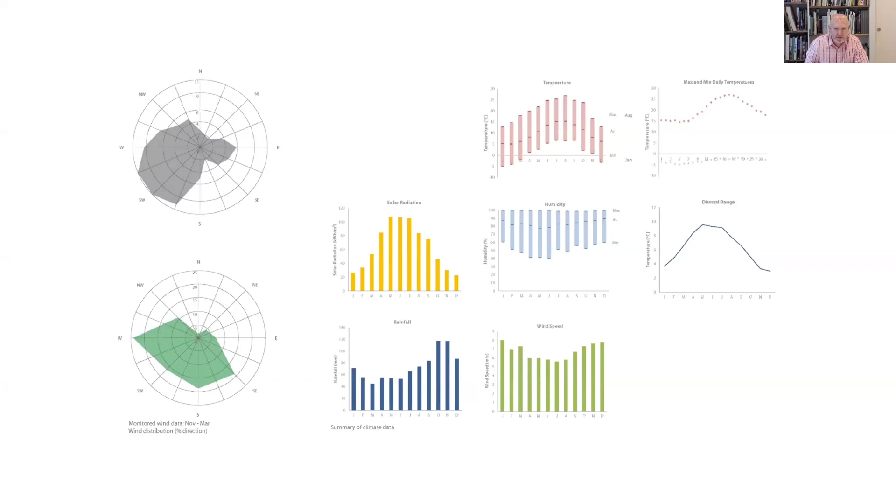The cottage is about 65 square metres, and the extension or new house was 350 square metres. The planners originally wouldn't give us planning permission for a new dwelling on the site, so it had to be an extension, and then once it was built, we applied to turn them into two separate dwellings.

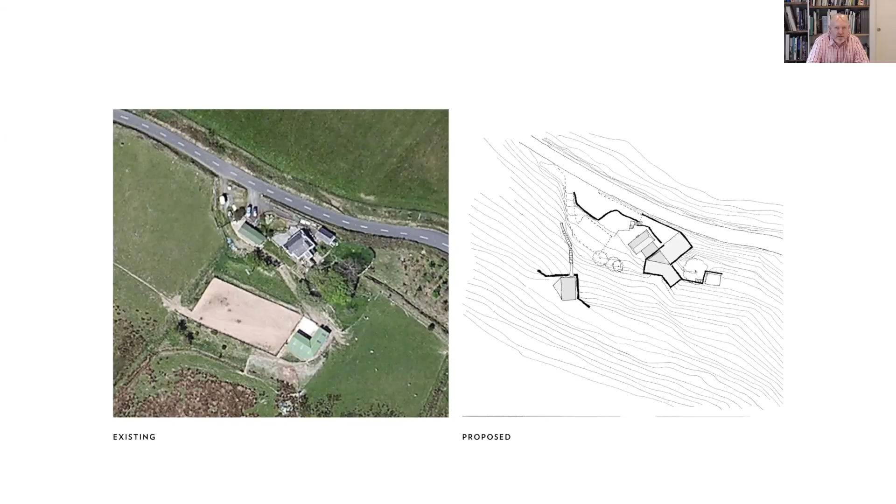On the right-hand plan you can see another building, which is actually a visitor centre just to the southwest of the cottage. This was a prerequisite of planning, really. In order to build the house and create the nature reserve, the clients wanted it to be a public resource, so we committed to building a visitor centre, which I'll show you at the end, to attract tourists and for local schools and other organisations to utilise the site and study the nature reserve.

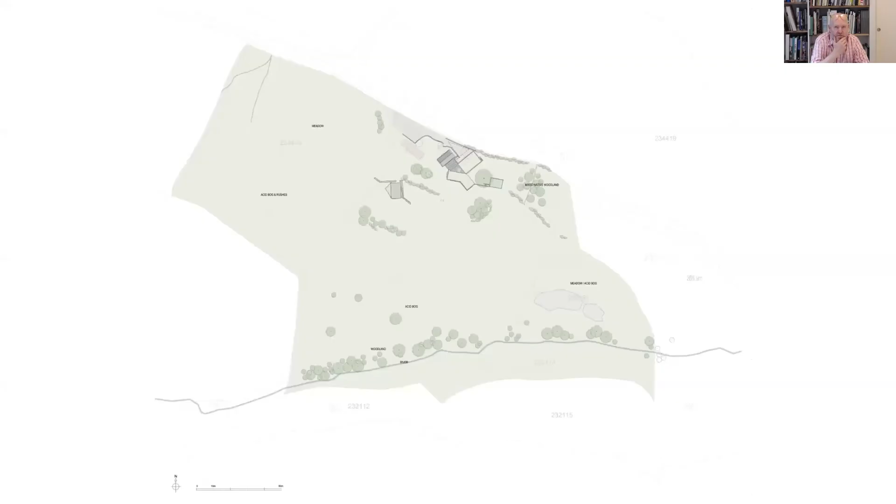This plan shows the house, the visitor centre, and the extent of the nature reserve. We worked with the Manx Wildlife Trust, who did a baseline survey of the site to understand exactly what the flora and fauna were, so we could later monitor the development of the nature reserve and see how well it was doing.

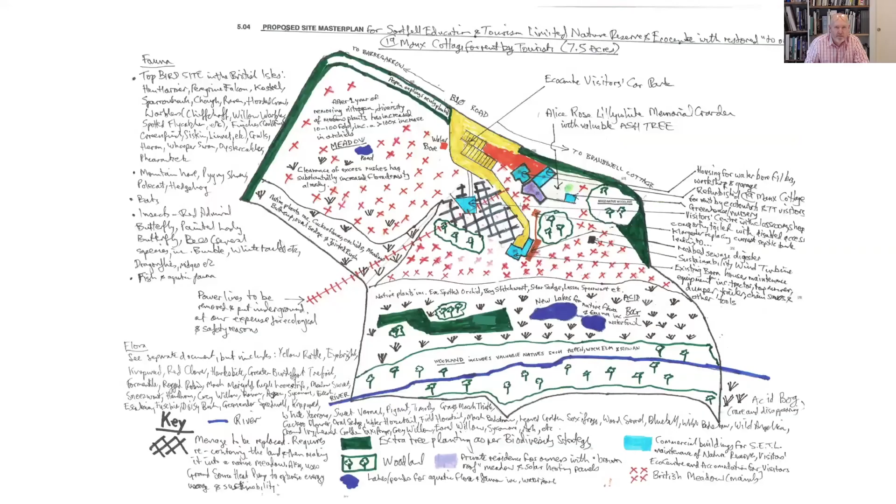This is one of the things we were interested in, in terms of using the stone. Not only are dry stone walls a key feature of the landscape, they also become part of the landscape - they get populated, all the niches and spaces that contain plants and insects, and even birds occasionally.

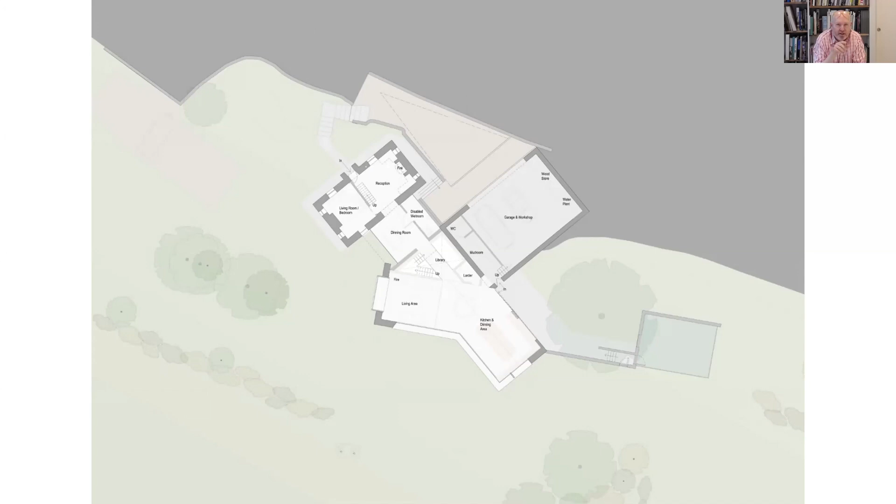This is the cottage and the new house together, and you can see how it blends into the landscape. These were key views for the planners, so we actually did some montages to begin with to illustrate how it would look.

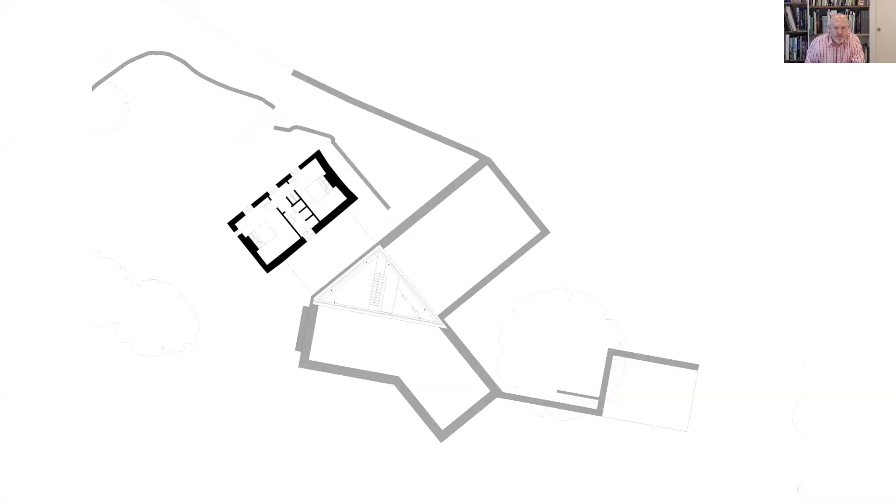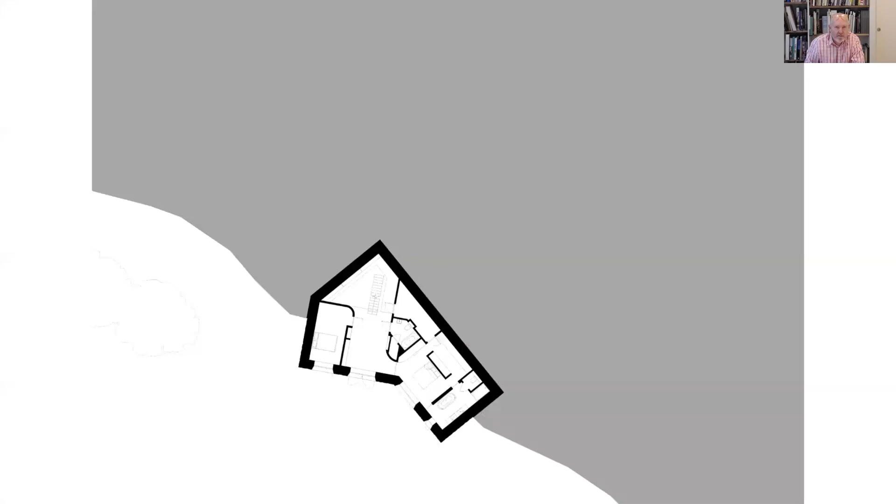And then in the lower level, we've got the bedrooms and bathrooms. And the staircase again comes down, so we get this kind of filtered light coming from above. But because it's dropped into the site, you get daylit windows as well.

One of the important things to note about the building is the stonework. Sort of 80-90% of the stone came from the site. So when we dug the lower level, we excavated and harvested all the stone, and that was then used to create the facade of the building.

then half-bedded stonework. So we created these niches in the stone, in the face of the stone, which could be then populated by plants and insects.

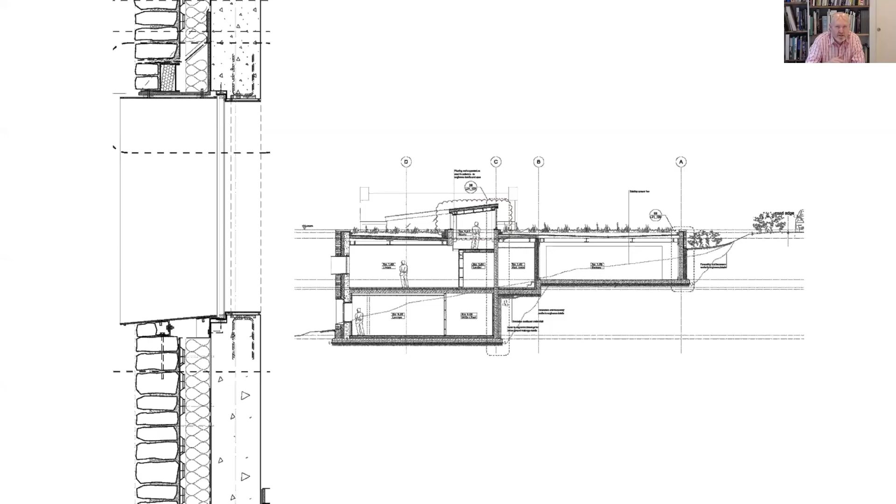And this is our environmental strategy. So we used a lot of different technologies here. We used a combination of things, so solar thermal panels, wind energy, biomass, and also a ground source heat pump.

We created a lake on the site in the nature reserve, which the ground source heat pump was installed into. And then we've got kind of clever things like earth sheltering and wind sheltering in order to kind of improve the performance of the building through design.

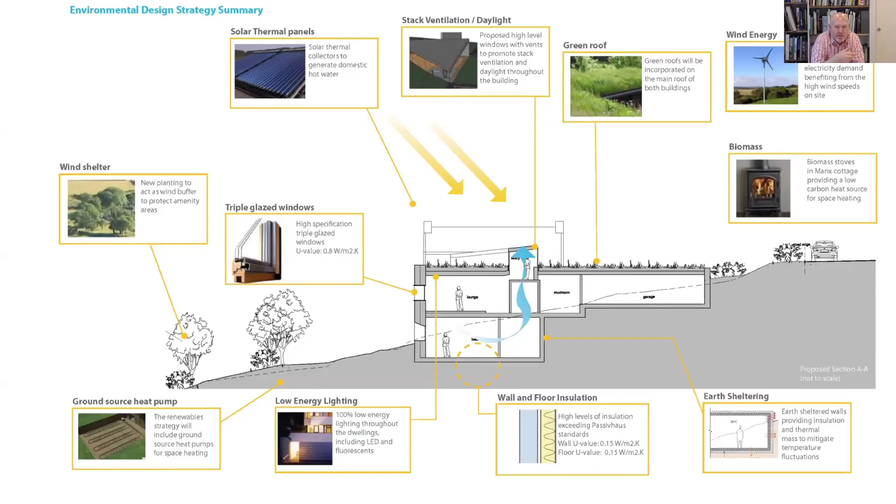This shows the sort of stack ventilation to that knowledge centre or library space.

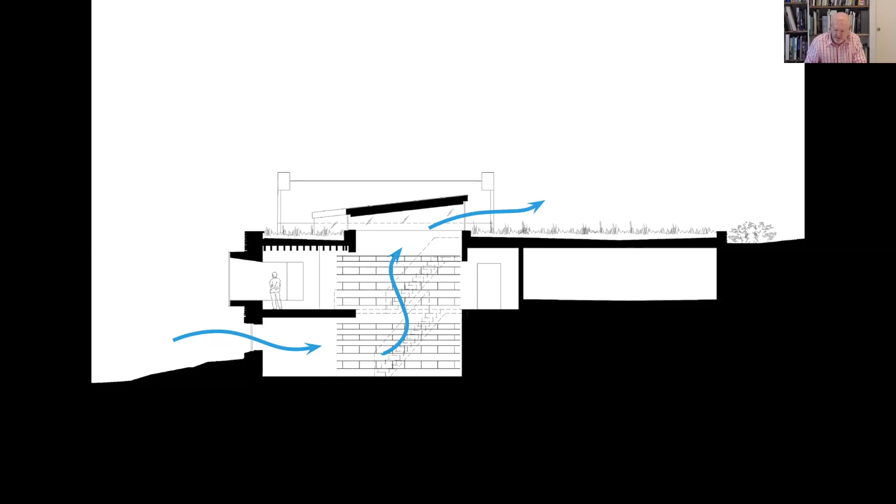So this shows the stack ventilation coming through the office space at the top. And this was a diagram just exploring the solar gain that was going to be coming through the ribbon window and the link building, which links the cottage to the new house.

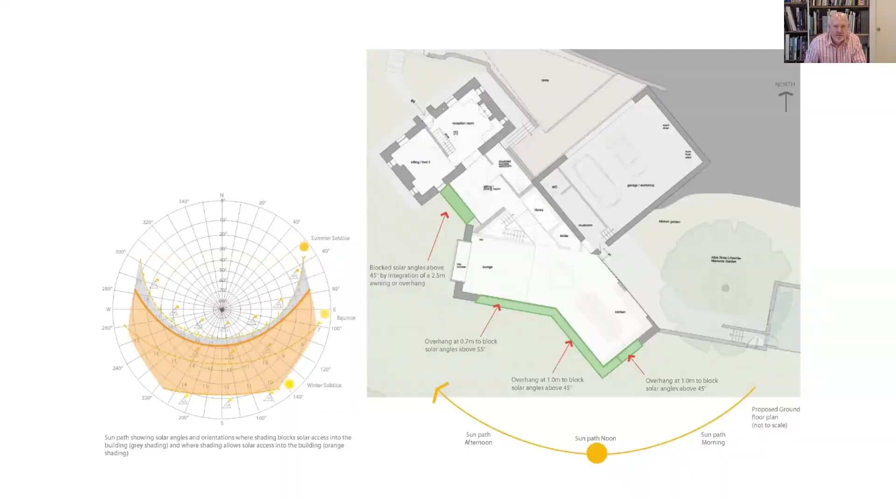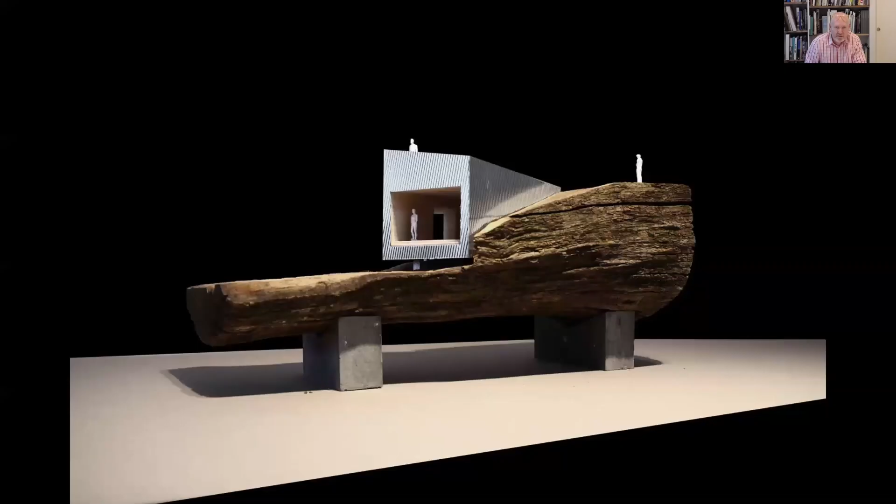And here's a couple of images of the visitor centre. So this is a model that we built of it. So again, it kind of sits into the site. And this is scheduled to be built in the next 12 months.

And that's it from me.

That's brilliant. Thank you very much. I mean, I found that fascinating, and obviously everybody else did as well, because I've had some really interesting questions come in. Okay, one of them is asking how

difficult it is through the planning process to actually design something as an extension and then later get permission to turn it into two separate dwellings. And I don't know whether you just want to make a note while you're talking about that, about whether I've no idea what planning is like on the Isle of Man. Is it separate? Is it a different system, or is it a system that we're all used to?

It's a similar system. I mean, it's a small place, so everybody knows what's going on. And there are other places in the UK that operate in a similar fashion. You know, we've worked in Cornwall.

Right, but it's UK planning law. Yeah, it is. But because you've got quite a tight-knit community, it's very important to kind of engage with people. And I think one of the, you know, that was really, really important because we were architects that weren't from the island. And our clients weren't from the island either. So it was very important to kind of engage with the local community, you know, get to meet the parish councillors, get to meet the local councillors and, you know, politicians and so on. And our clients were very good at doing that and kind of selling the idea of the scheme.

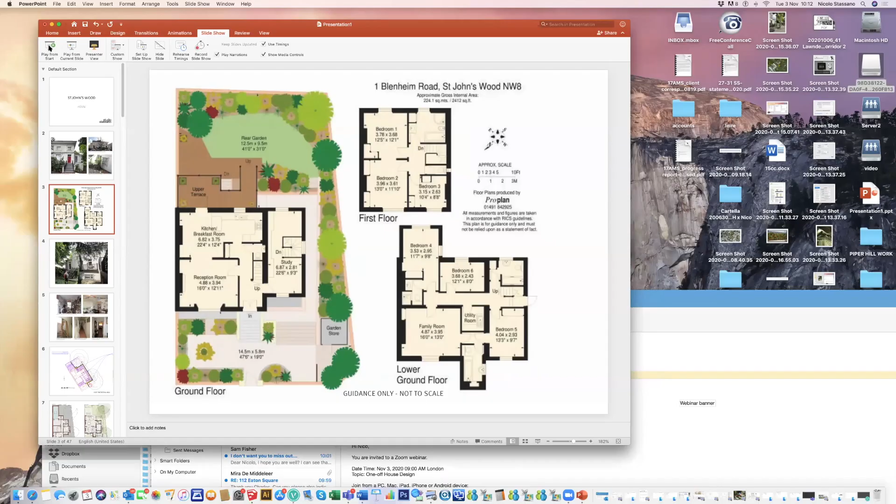Okay, is it visible now? That's perfect. Yeah, if you want to go full screen, we're good to go. So, okay. Here we go.

Okay, so here what I was saying, this is a semi-detached terrace, 1840s, and it's Victorian. It had some alterations in the past, but not significant alterations. So you can see on the right, this is the building. Just to introduce the existing building - what I was saying before, the interesting part is not only how these dwellings have evolved through time, but how they will get changed to accommodate current modern lifestyles.

This property - one of the interesting bits - it had a lower ground, but historically a lower ground mostly would have been back of house spaces. But you can see from this plan, it's completely detached from the external garden, and it accommodated mostly all the rooms. The ground floor is potentially the more family floor, and you can see that in time it had changed to accommodate the kitchens, which usually would have been on the lower ground. Then on the upper levels are more restrained floors, and you could only have a limited number of bedrooms. So in this house, most of the bedrooms were mostly on the lower ground.

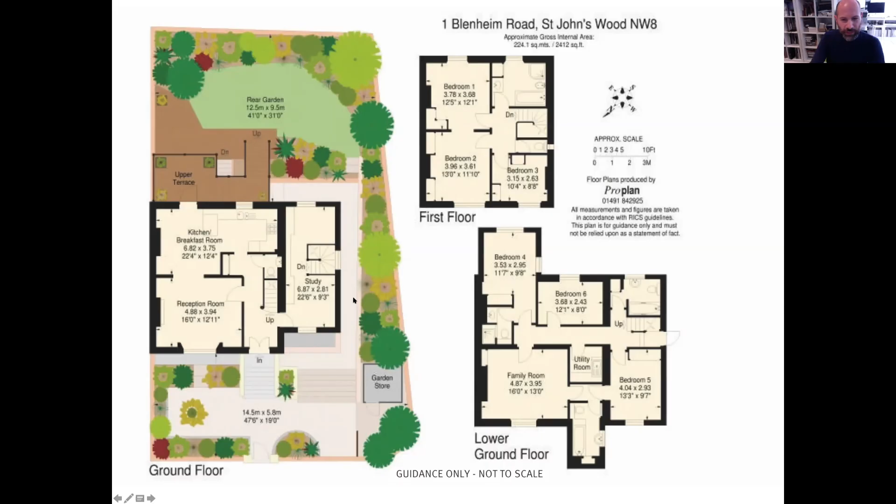So this is the house - you can see the 1940s rear extension, which is quite small, but you can see the relationship with the external ground. It essentially was dug, and it was sunk within the external landscape, so the only connection to the rear was through the rear terrace. To give you a feel of the spaces, this is the side extension where the stair goes down, and then you get a feel about the lower levels - very cellularized, very small spaces, quite dark, with very limited access and views to the exterior.

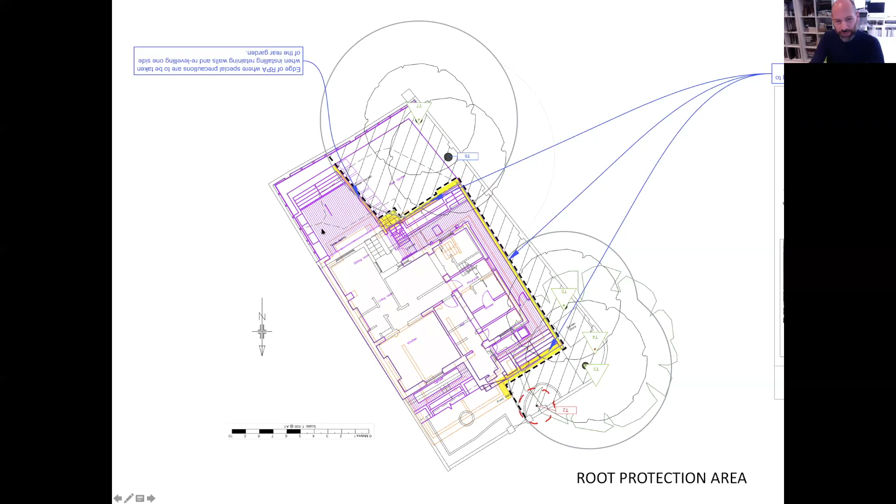I'll take you through what was a process from pre-planning, planning, and the build. What you see here is the pre-planning. The pre-planning always becomes a part of the process where we begin to test the brief, but also test planning law. Like all nice basements, they always start with a swimming pool.

In the beginning, the client, who has a family with young children, the idea was that they were going to move into this property, and they aspired to have a swimming pool, and a large basement which could accommodate a gym, a cinema room, and then some bedrooms.

The lower ground would be the space that would be transformed. The idea is that the kitchen, which was on the ground floor, would be moved onto the lower ground, and the lower ground would then become the heart of this family home. What was primarily important is that the spaces would be opened up.

Not only opened up as larger open plan areas, but opened up so they could also connect to the exterior. So you could see the landscape being carved away, with the limitations of the root protection area. This is why, pretty much, you see the forms that we're having.

The aspiration of a large rear extension that could then be fully opened to the rear. What you'll see later on through the images is the insertion of a new stair, which is much more celebrated than what was there before.

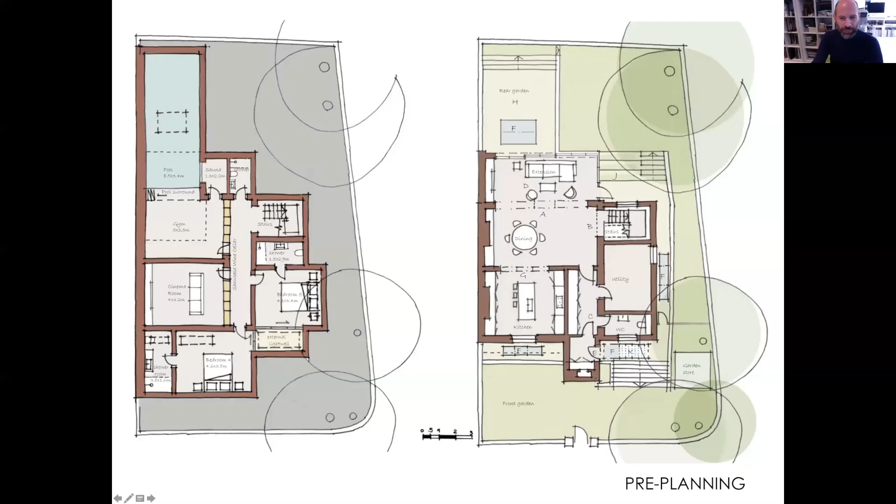Then the kitchen set at the back. So you begin to see the relationship between the root protection area, or the elements of the ground that had to be retained, and elements that could be carved away, and how that began to interface with the aspirations for a large extension.

So this is the ground floor. You can see the rear extension at the back, and then the balcony that's been retained.

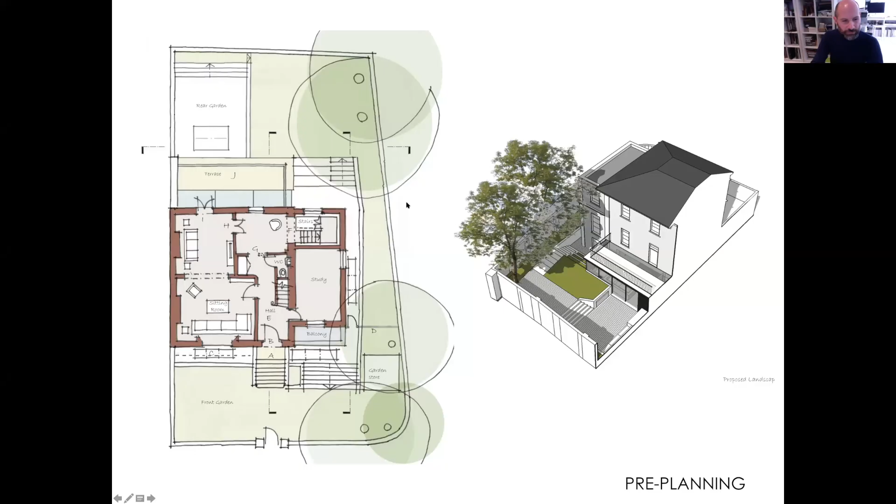So this is the initial visuals, and here you can see potentially a slight conflict, you know, for a client desire to extend out, and a real sort of constraint which had to do with the root protection area.

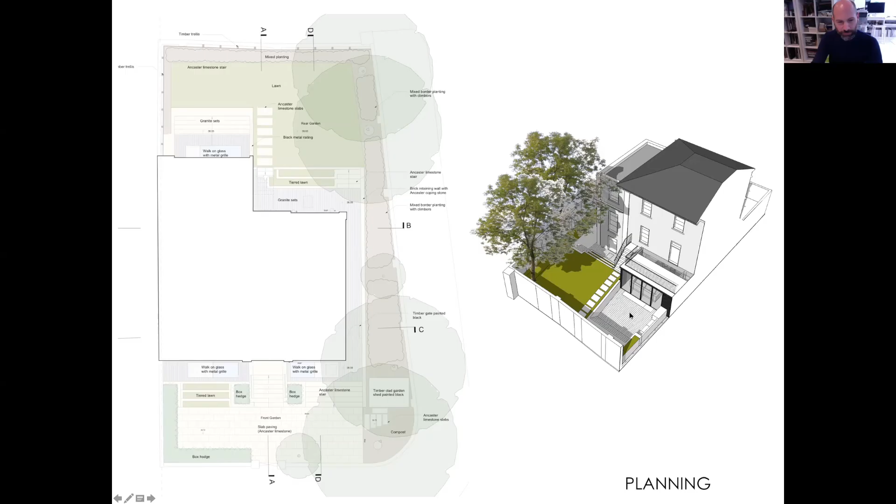So what you begin to see now is a process after pre-planning, where obviously the rear extension was reined back in, and in a way will sit more harmoniously within this landscape. This is the revised visuals.

What I'll go on to now is the house itself. I'll start sharing the plans which got approved and which were built, and I'll start from the basement.

Pretty much what defines the basement is always the footprint of the original house that you underpin. In this case, it's the original house plus the side extension. We had demolished the site—we managed to get permission to demolish the side extension because it was an addition, and rebuild it.

What you then have is areas outside of the footprint, which is always what then gives an opportunity or defines the interior, which is the light wells. So what you begin to carve out or create spaces always defines how you can bring light and ventilation in. We've got at the front the two light wells, which would then be dedicated to two rooms.

One of them would be a gym, and the other one would be a guest bedroom. Towards the rear of the property was a larger space, which became a multifunctional space with a larger light well. This space was meant to be a cinema room, a children's play area, a place they could entertain their guests for parties.

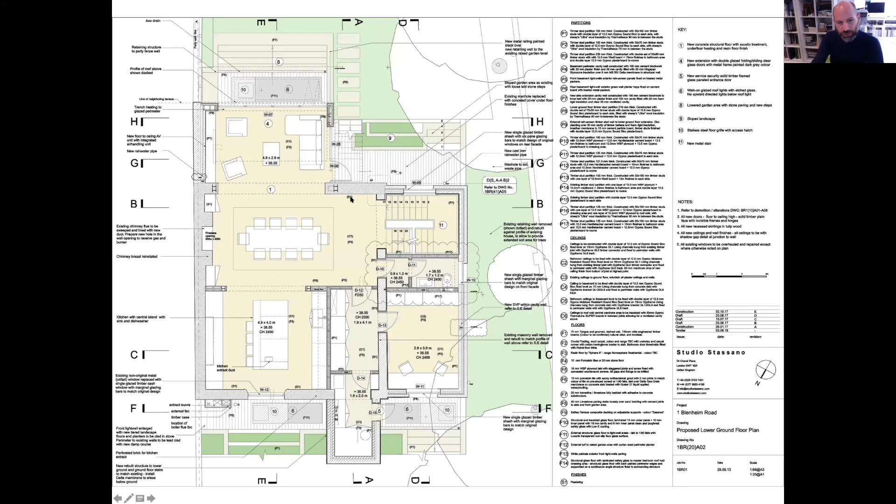This is where all projects start with a very short program but end up running very long. So what typically could have been done in maybe 6 or 7 months went down to 1 year and 6 months just because of the appeal process.

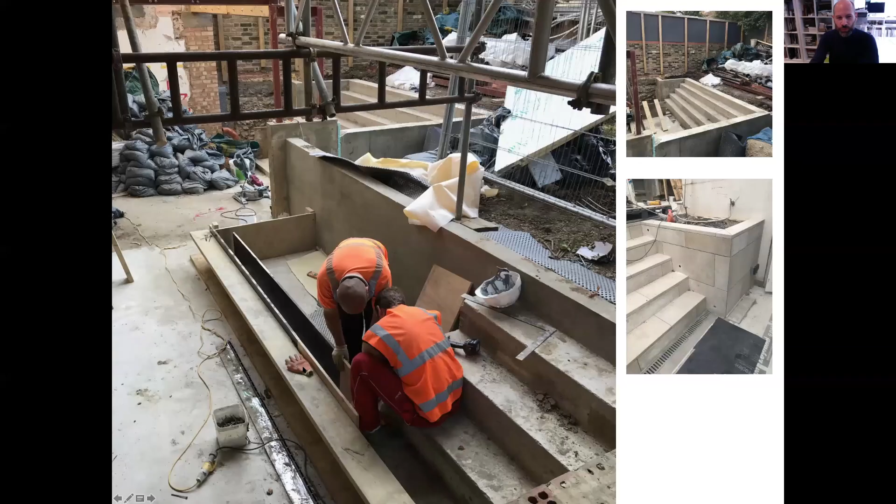And again, this is just to give you a snapshot of what that same site looked like when we were building it. So this is essentially the stairs leading outside the rear extension, and this is the tiered landscape that was being built.

Later on, how that was finished - this was finished in porcelain, 20 mil thick porcelain, and every piece was mostly manufactured off-site to create the right edges, the right edging detail, and it was assembled and installed.

Moving from the inside, and this is in a sense what the property wanted to achieve, obviously within the limitations of the landscape and its levels, but the idea of opening out to the rear garden. So not feeling sunken, but trying to open outside.

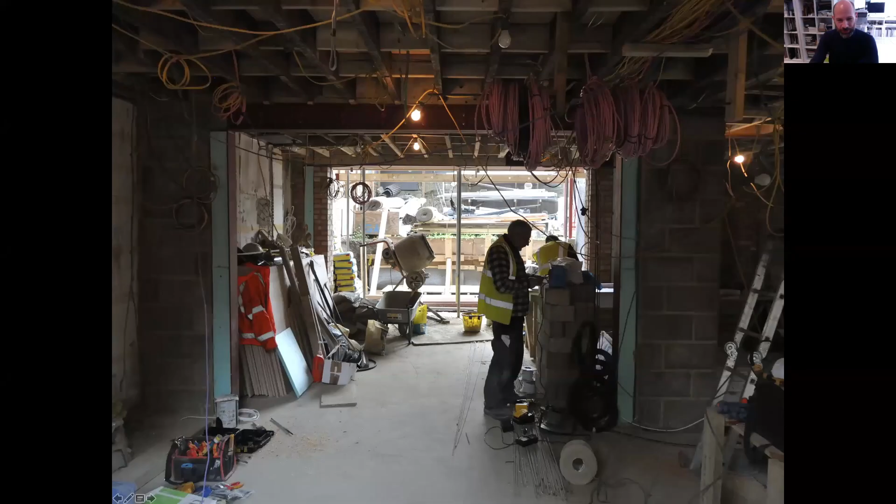And that has been built. So this is, as we built it, we had a new lower ground floor slab. This had underfloor heating. Again, you can see the structural openings from the front room towards the rear, and just the amounts of cabling and services that really have to work their way through these historic interiors.

A view again, from the inside looking out. This is really trying to make as much as possible of pulling away the landscape, so we could allow light and aspect outside.

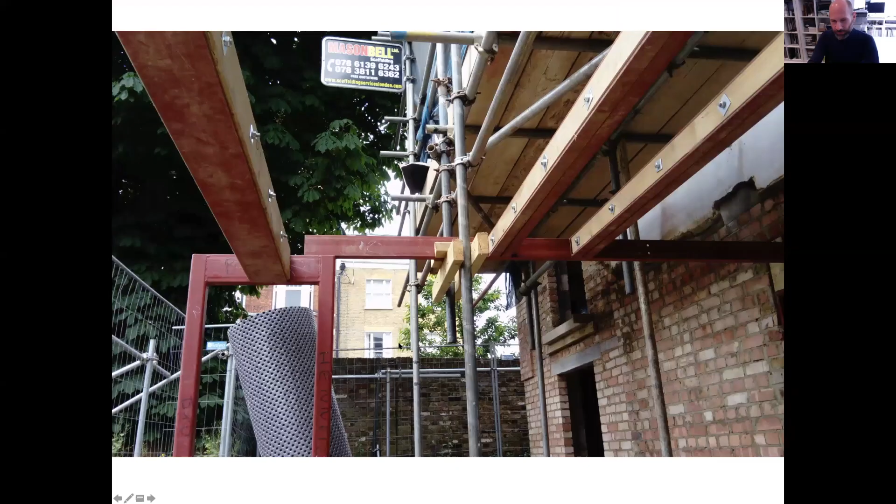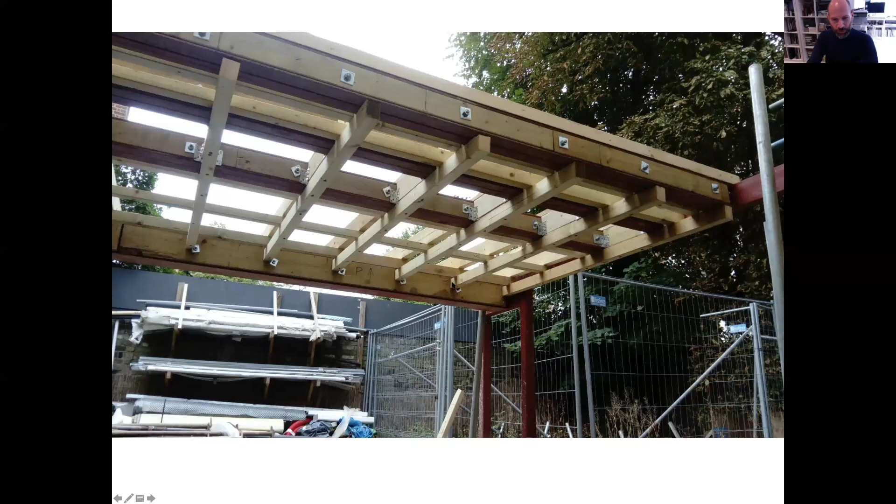This is the construction that shows us the metalwork and the formwork for that roof. I must say, in all rear extensions, the roof is one of the most difficult aspects, because we have limitations in depth and in levels, trying to tie in with the ground floor. The amount of acrobatics that happens at this stage in terms of structure requires quite a lot of time to get right.

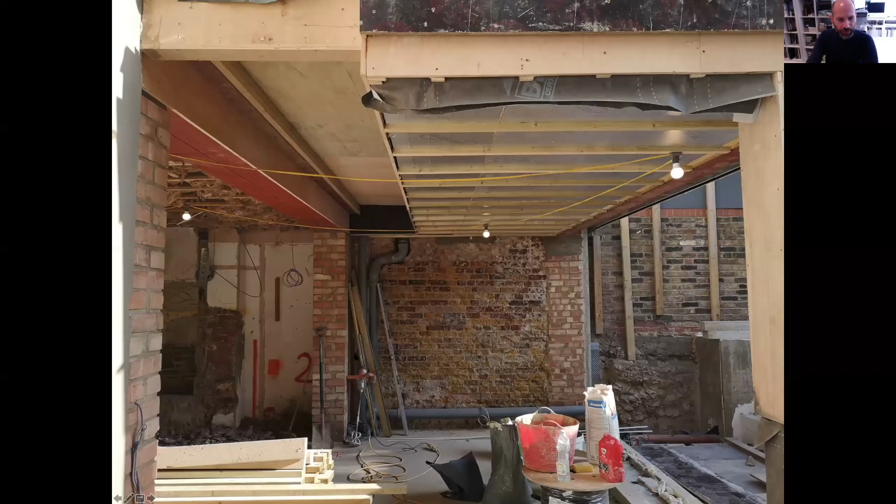This is a view essentially like a long section. You can see the opening created within the principal building, with large steels to hold up the house above, and then the extension being built out.

Another aspect which always becomes quite important is how do you actually drain the principal house. This shows the downpipes, waste pipes, and rainwater pipes tucked away in the corners, some making their way into the basement. But most important is trying to make all the upper levels gravity drain towards the sewers, taking as little as possible down to the basement.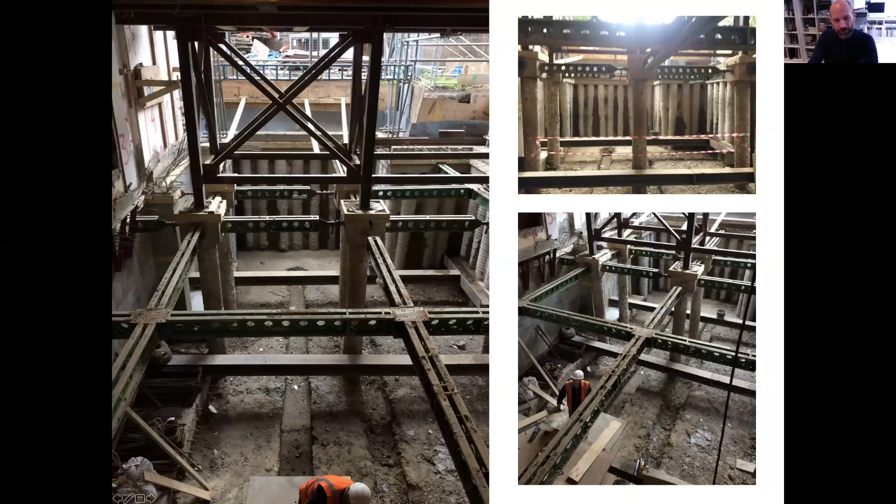But most important, and really an astonishing part of the build, is that these houses, however small they are or however small they feel, building a basement is a large exercise. The amount of steel work and structures required just to hold up these properties is incredible. What you see here is the formwork and sacrificial pins, steel work that is just holding a house hovering above us. And you can see here the basement being built and the whole piles that have been done.

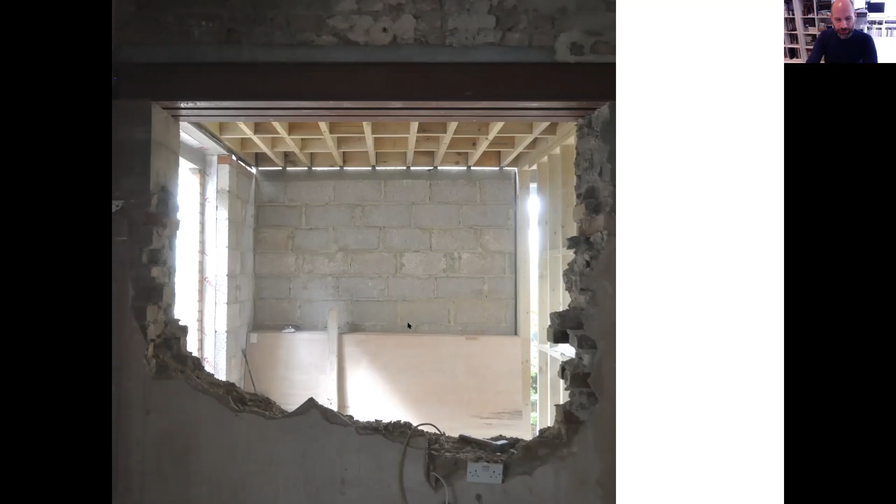Again, snapshots - these are the openings, suddenly opening onto the side extension that was rebuilt, and snapshots of the basement.

It really did feel like a different world, you'd walk down this basement. You're always looking for height, always looking for ceiling height. The finishes aren't here yet, but these were vast, large spaces. What you see here is just before we were going to insert the stair, the space where eventually the stair will come down to.

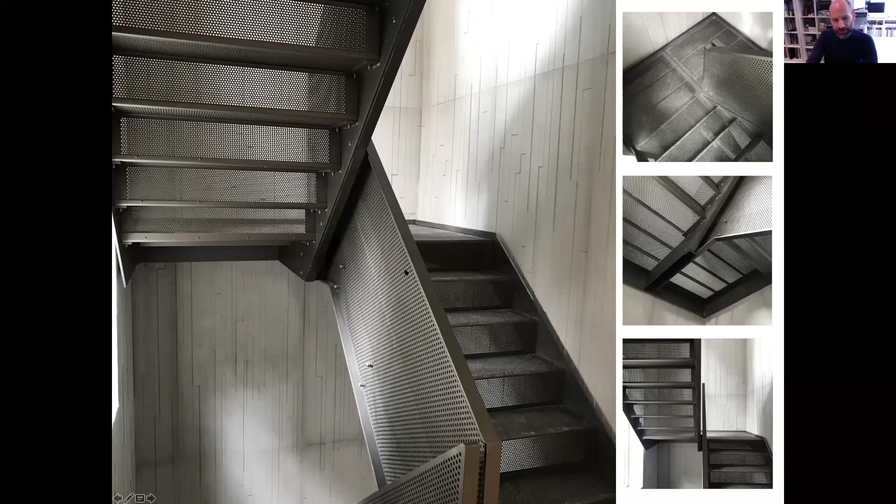The stair that was built was selected with our client, and they felt they wanted something slightly industrial. So we designed a metal stair that was wholly perforated and would float within the void, allowing light to go through the perforations. Even this was quite a challenge. The whole stair was built and fabricated outside in the workshop, but because we were looking for specific seamless details, all of the stair was actually painted on site. It was this electrostatic paint, which was done after it was inserted into the volume.

Now we start to go down to the basement. As you come down the stairs, you've got the Crittall glazed openings that would open up into this multifunctional media room. It was quite effective, as it did allow a sense of openness. This is looking back at the stair now.

And from that media room, the light well - in this case it wasn't a folding sliding door, but just a sliding door, because we wanted to minimize the amount of framing to create more openness. The idea is that these could be opened up, and then essentially bring ventilation and light inside. This is pretty much before that.

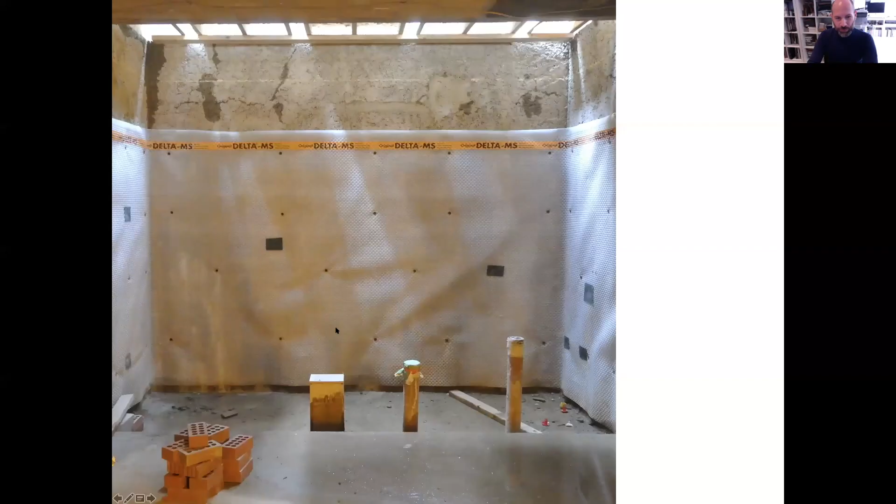All the basement was waterproofed with delta membranes, which went down into modular sumps that would drain the membrane. The whole basement was made of membrane, insulation, and then block work. On top of the block work we'd get quite a rigid finish, so we could then plaster on top of that.

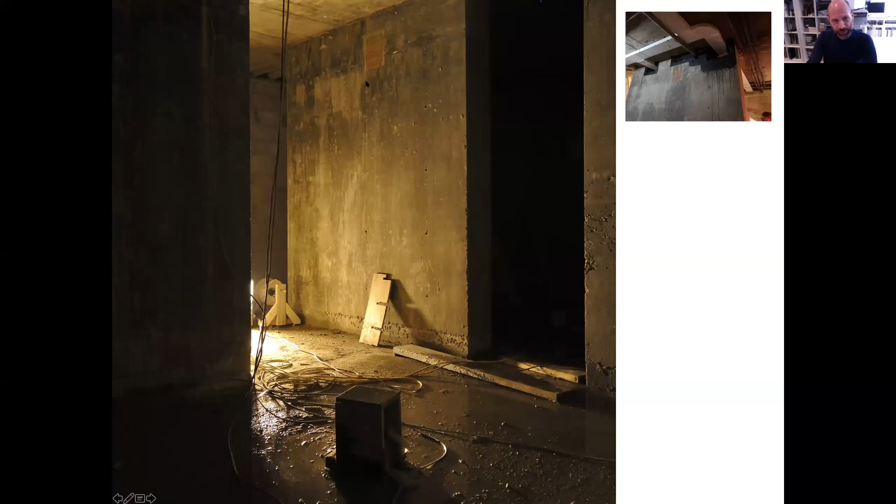Again, snapshots of the basement. An interesting thing is that the basement is always built with concrete, and a usual coordination issue is that the builders never really get the builders work right. So it always happens that once this is all done, holes are chopped up and cut out - and this is where the engineers get all quite worried.

And then back to the inside. This is, again, that central corridor, to which one end there's a guest WC. To the left, as you see here, is that multifunctional room. And facing the other way is the corridor, which then leads onto the two bedrooms.

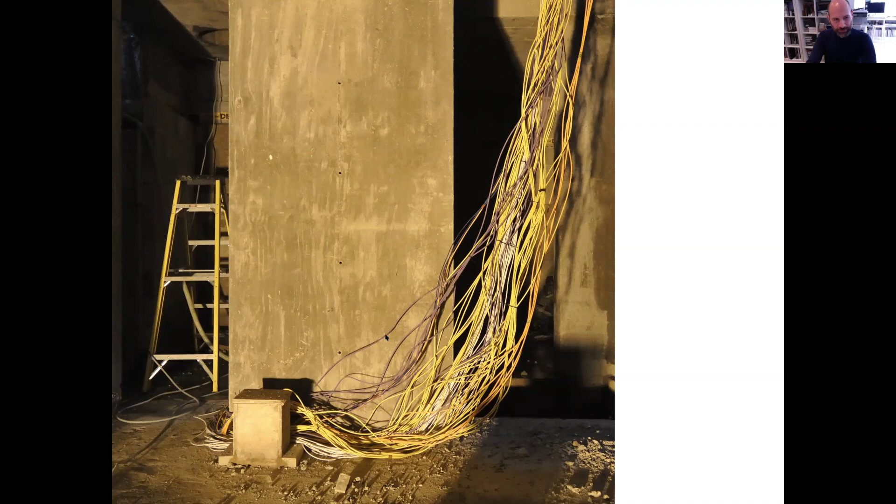At the end of that corridor is essentially an opportunity to bring a little light from those light wells, but it's also the utility room. Again, you can see here work in progress photos. The build process, the amounts of cabling and services that have to be routed through this basement is incredible.

Here, this is the room at the end of that corridor, which was the utility room. And within that utility room, we had the hub. So we had all the lighting, Lutron panels, as well as all the AV racks. And you can see just the amount of cabling that came to this location.

And then tucked away on the side was the plant room. This property was designed to have mechanical ventilation to the lower levels, and then cooling to the basement, lower ground, and master bedroom.

This is, again, one of the light wells, just separating the utility room from the bedrooms. And this is one of the bedrooms.

What always comes as an opportunity in these historic buildings is that the lower ground or basement does not need to be very classical. So there's more opportunity to provide more contemporary design. As you can see in this case, the doors are all full height, we've got seamless finish, recessed skirtings, no cornices.

The light wells, again, views through, and some of the interiors of the bathrooms. That very same space, you can see the slot that goes into one of the bedrooms.

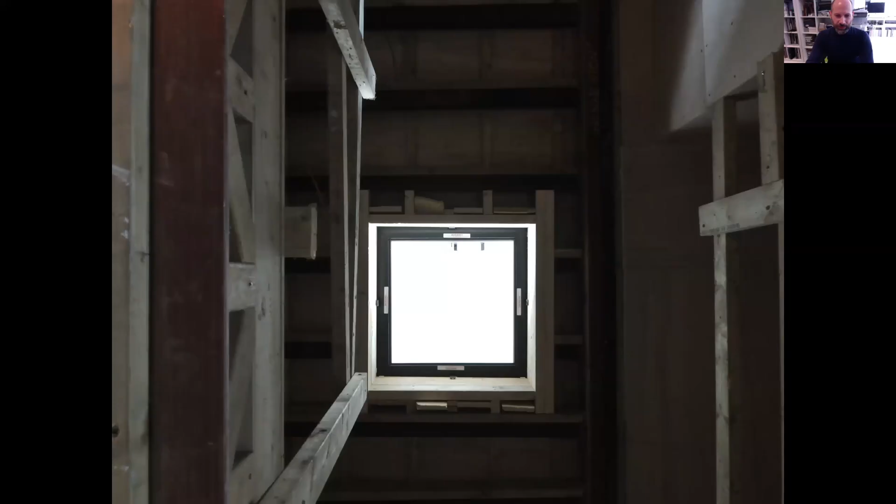And I'm going to finish here. This is the upper level. This is a master bathroom. Again, sensitively trying to keep some of the historic features, and yet insert a modern bathroom within that.

Okay, thank you very much indeed. That was fabulous, and I think it was really lovely to actually go through the process of both design and construction.

There are a lot of questions, and they almost all relate to the basement. I'm going to throw a few things at you. There's quite a few to do with fire. Story height doors, how did you manage fire protection, controlling or sealing? Given your use of sliding doors to the Crittall screen at the basement level, was there a reliance on enhanced fire detection to the habitable rooms at all story levels?

Yes, we did. So to create this sense of openness throughout the house, we had to introduce these doors that you see here, which are the doors to the media room. These are hinged doors, they're metal, but they're fire rated doors, half an hour fire rated doors.

But for the lower ground floor, the whole lower ground floor was open to that staircase, which was then open plan, as you see here. So to achieve that, we had to put domestic sprinklers onto the ground floor.

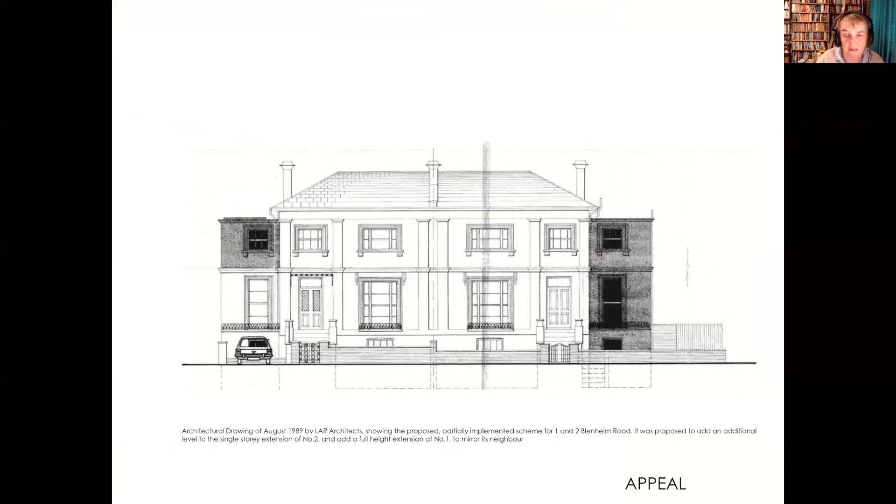I'll take you to the plan. So the ground floor was equipped with sprinklers, each of these rooms had one sprinkler, and that allowed us to create that sense of openness that we achieved.

Right, okay, sorry, there's a bit going on in your background, isn't there? Sorry.

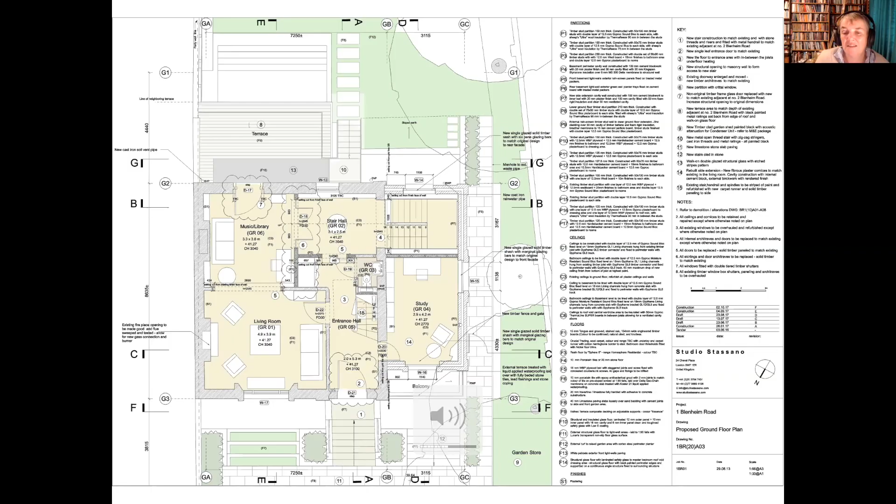I've had a couple of questions around insurance. I'll throw them both at you. The first one: I've recently experienced an issue with building insurance. The property under consideration was underpinned to create a part basement. When it came to renew the building insurance policy, the insurers refused to renew because the property had been underpinned to create the basement. So did you have the same experience? There was also somebody saying they're finding PI much more difficult and expensive this year.

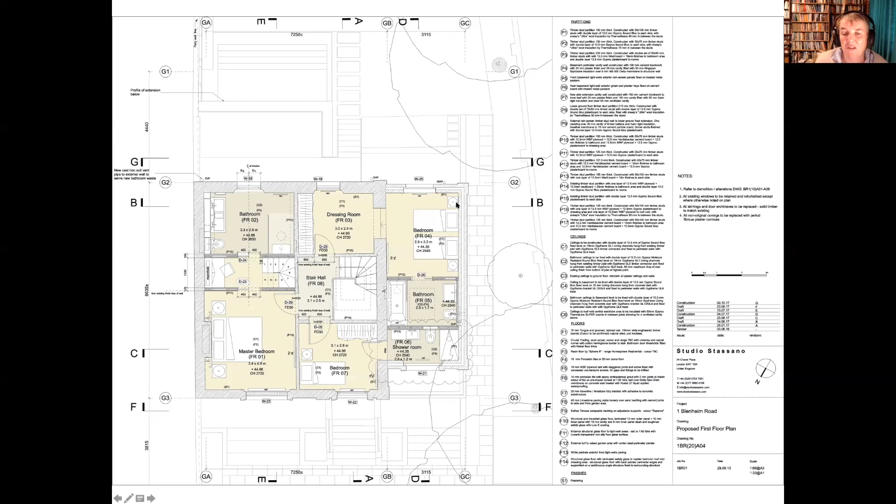Obviously this is a different kind of insurance, partly because of having done basements. Having done a wonderful looking basement project, have you found the same? So there's whether this affects your own PI, because I suppose it's seen as a risky undertaking, and also that feeling of, oh, underpinning, there must be a fundamental problem when actually the property has been underpinned because you're creating a basement. I think it'd be really interesting to hear about both of those.

I think one aspect of insurance falls under the insurance between the owner and the builder. The first question - well, I don't think it's the owner and the builder. I think it's the owner trying to insure their property afterwards and discovering that because it's had underpinning, that's affecting their insurance. So because underpinning is usually a result of subsidence or something, isn't it?

In terms of building the basement, when we build a basement, for instance, this property had subsidence in the past, so it had underpinning. Now, by building a new basement underneath it, this property is more secure from any subsidence. So if anything, it would be more stable. I'm not too sure how that will affect a built basement, but if anything, this building will be more secure and more stable.

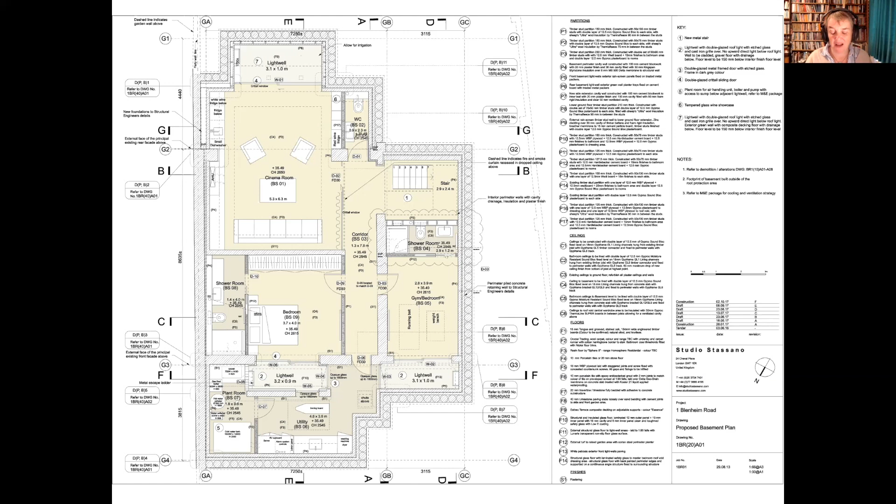That's really useful. I think we could talk about this and a lot more for quite some time, but what we're going to do now is move on to our final speaker. We're moving away from the very elevated area of St John's Wood into suburbia, where an awful lot of us live, and I think maybe quite a few architects wrongly don't really aspire to design there. But we have Percy Weston, co-founder of studio Surman Weston.

He's going to talk about his Ditton Hill house, which he's calling Reconciling Suburbia. I think it is fantastic to see this house, which is both modern and playing on some suburban tropes, but I won't steal your thunder. Percy, over to you. Hello, let me just share my screen.

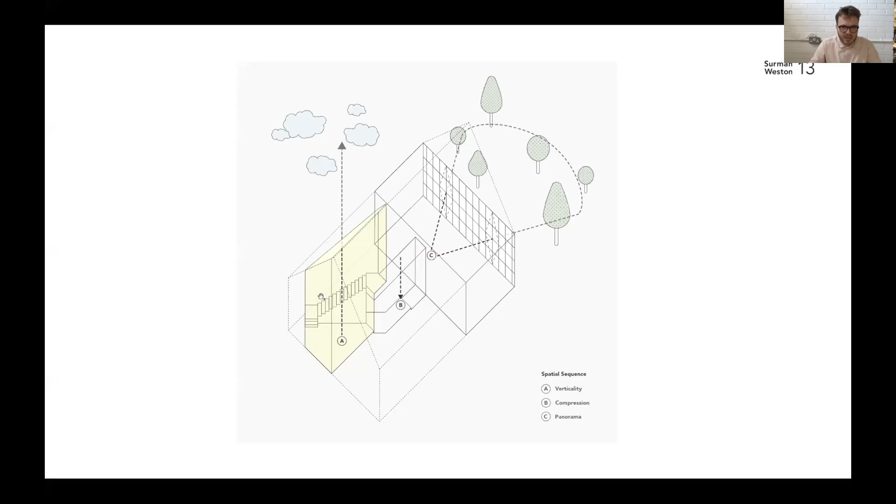This diagram explains a bit about the main tectonics of those spatial experiences. Here is the entrance space that you come into. We really wanted to emphasize verticality here, since the plan is quite tight, and to emphasize the view up to the clouds, basically to the sky. So it's a triple height space when you come into it.

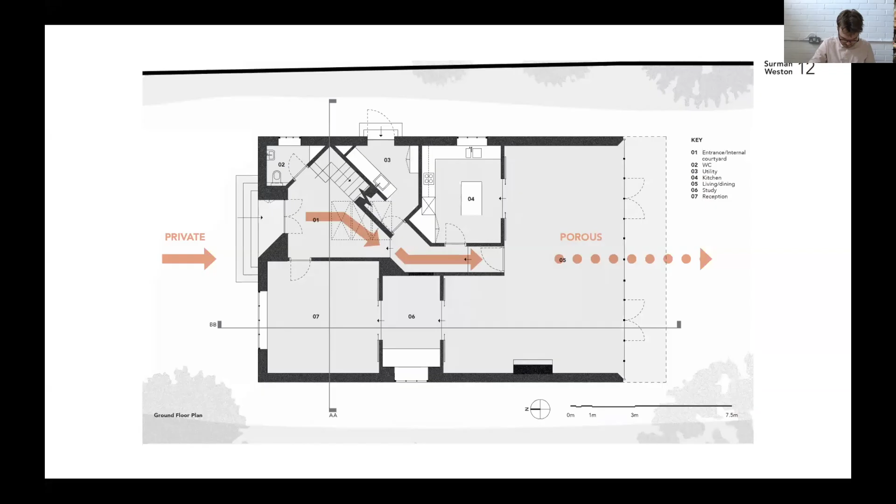After that very vertical entrance space, you pass down a single step under the stairs through into an interior hall space, which was intended to emphasize compression. The ceiling's much lower, it's much darker, so there's a really strong spatial contrast between those two spaces.

And then after that compressive space, you go down another step and walk into the main space at the back, which has a full width panoramic glazing, and the ceiling height goes up and it's much more naturally lit.

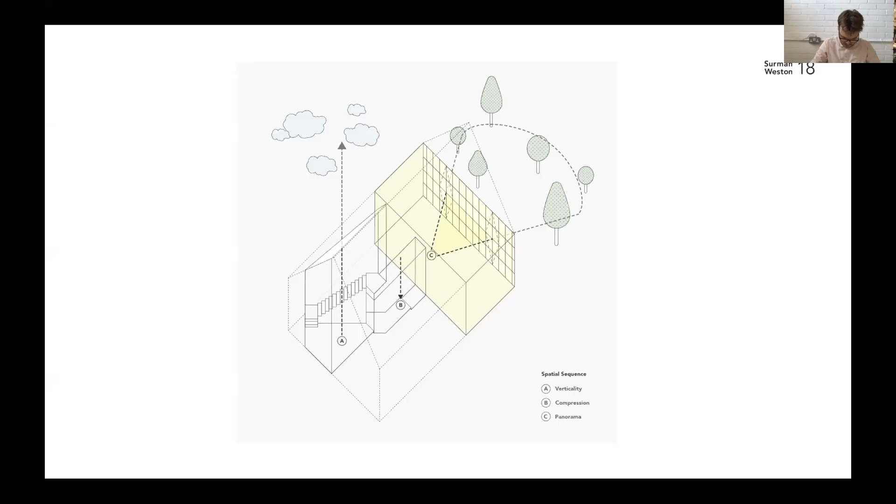So here on the plan, you can see on this side, this is the dining and living space I've been talking about. Because we wanted this space to feel on a totally different scale to the rest of the house, it was important that we could make it spacious and column-free.

One of the advantages of using an industrial technique like steel frame was that we could have this space completely column-free, so nothing interrupted the view. It also meant we could have a large cantilevered balcony.

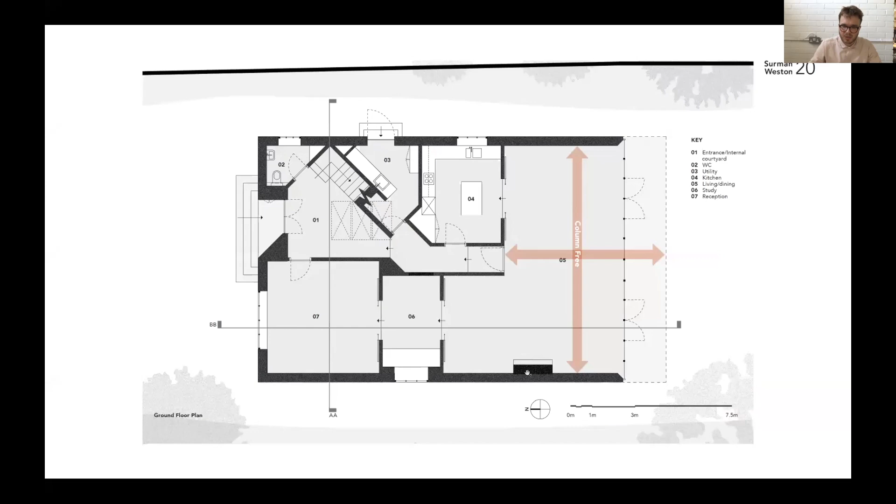We built this chimney using precast concrete lintels that you can buy at any local builder, and then combined that with slurried block work, so it's block work painted with a mortar slurry and then painted again.

It's a good point to talk about there being two main palettes within the house. We wanted the circulation spaces and the habitable spaces to feel quite different, again to emphasize the spatial contrast and difference in feeling between these two types of space.

Within the circulation spaces, the materials are much more industrial and rougher. Going back to some of these photos, you have the hand-troweled concrete floors and the slurry-textured block work on the walls. But within the habitable spaces, we have oak floors and plaster walls, and it feels a lot warmer.

So the fireplace, as the heart of the house, I suppose, is the only place where these two material palettes are combined. You have the timber floors and the plaster, but then you also have the block work and the concrete.

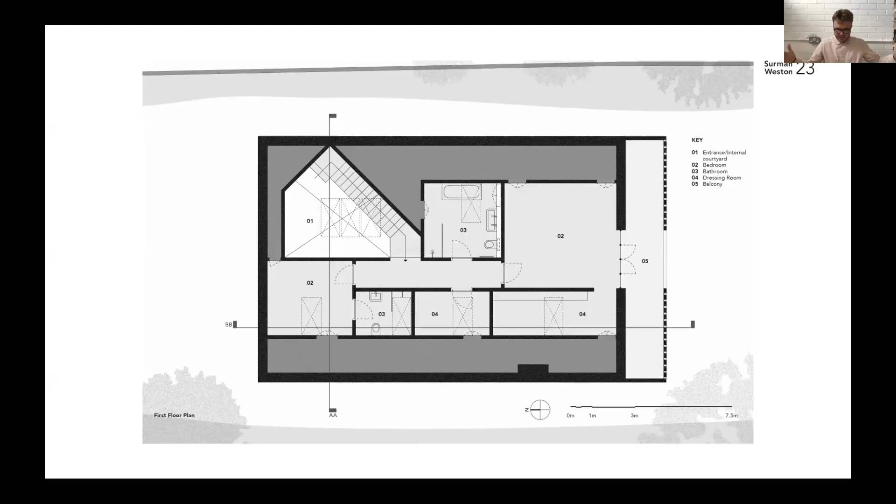The rooms at this level all have quite a dramatic geometry because of their location in the roof void. The eaves come down to about 1.5 meters, and then right at the apex you get 5 meters floor to ceiling.

Due to planning restrictions, we weren't allowed to put windows on the side elevations that could overlook on this level. That meant most of the other rooms, basically every room apart from the master bedroom, is top lit, which combined with the verticality of these spaces gives that floor a real calmness and more privacy, almost a church-like quality, which we felt was more appropriate for bedrooms and places of sleep and ablutions.

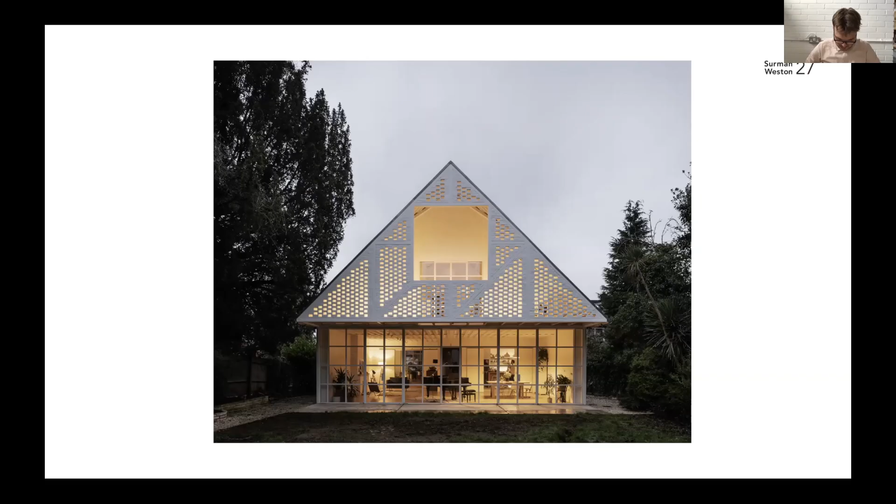Here you can see the rear elevation, and the balcony from there. The light, as you can see, is also two-way, so when daylight starts fading and the lights are on inside, you get this nice effect of the house starting to light up like a lantern.

This is a good photo to see on the ground floor, where you can see all the way through the house. Right at the back here is the window on the front of the house, and you can see through all the big sliding doors, which are all open on that side—that enfilade sequence of rooms. In the middle you can see the slightly darker circulation space, and that's actually us in the kitchen while the photographer was taking the photos.

The next part, I'm going to talk a bit more about our design process, aside from looking at the context. An important part for our studio is a lot of model making—it's very important for us. This was a site model, an early site model of the proposal.

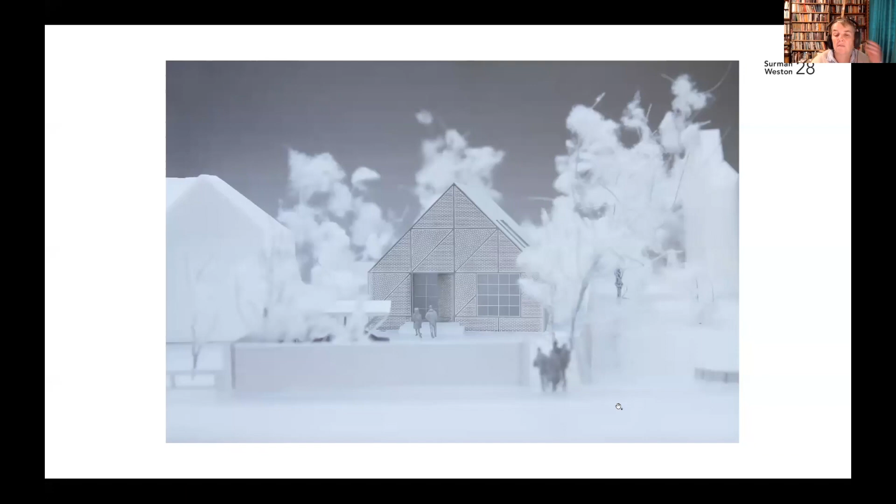As you can see, we did experiment a bit with the brick patterning here, with some diagonal brick patterning, but largely, considering this was made very early on in the project, the design intent remained pretty much intact, which is quite unusual actually.

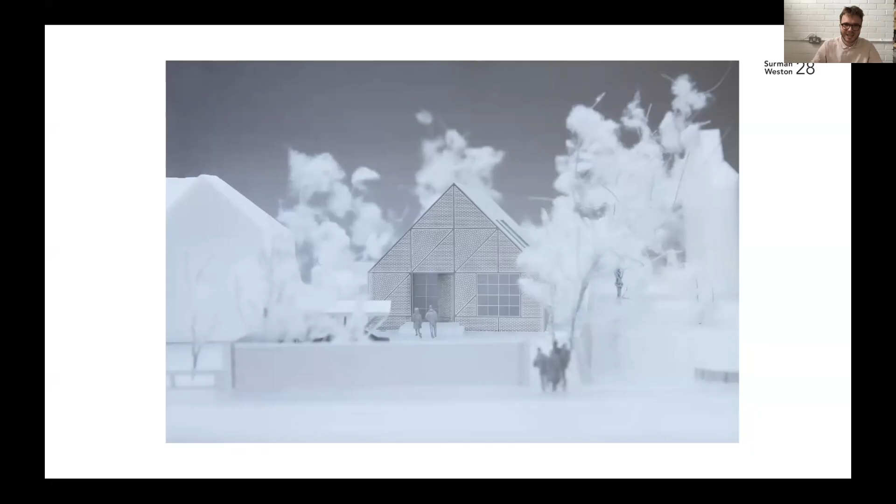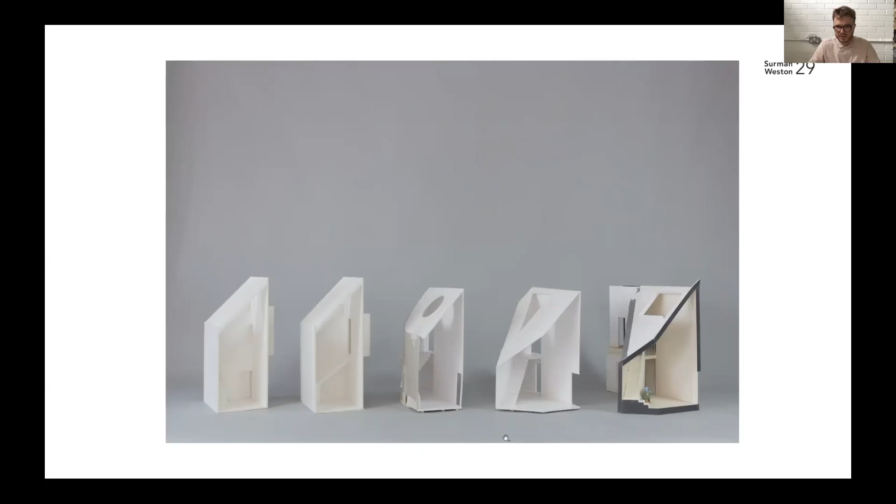With other models, we like to pick out details for parts of the project that we see as critical to the design. As I spoke about the entrance space, this internal courtyard took quite a while to develop to the design we eventually had. From the left was the initial design, to the right was the eventual configuration—the left-hand side much more orthogonal and conventional, and then we ended up here.

I'm aware of the time. Ruth, have we got a couple more minutes?

Oh, I can't hear you. I'll take that as a yes. Yeah, I think everyone's enjoying it. So let's crack on. All right, sure, sorry—that's me, I muted myself, I apologise.

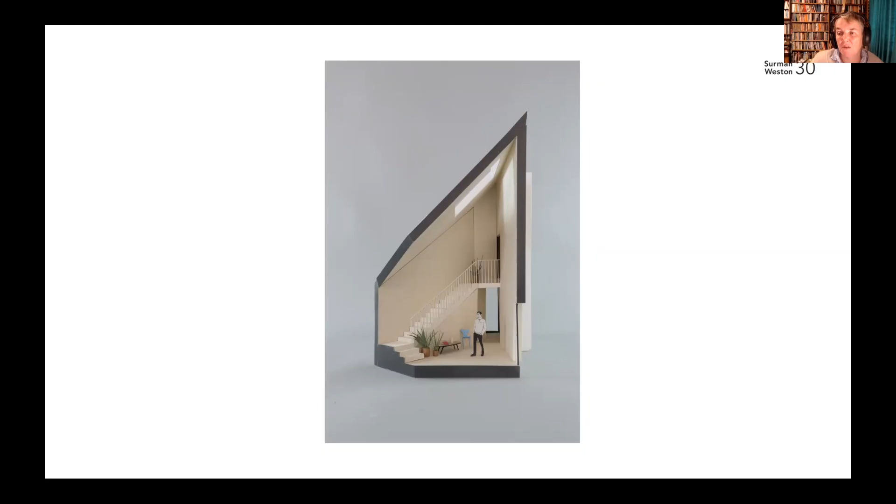I'm back. Yes, give us a couple of minutes, and then we'll come on to the questions everybody wants to ask. I've got a mere five slides left. Okay.

Right, so this was another model we made. I think all these models were 1 to 20—the later models, not the site model, obviously. This was a model looking through the house, quite similar to one of the photos you saw earlier on in the presentation. We're looking from the film room through to the study, through to the living space at the back of the house.

And then finally, I'm going to talk a little bit about the materiality.

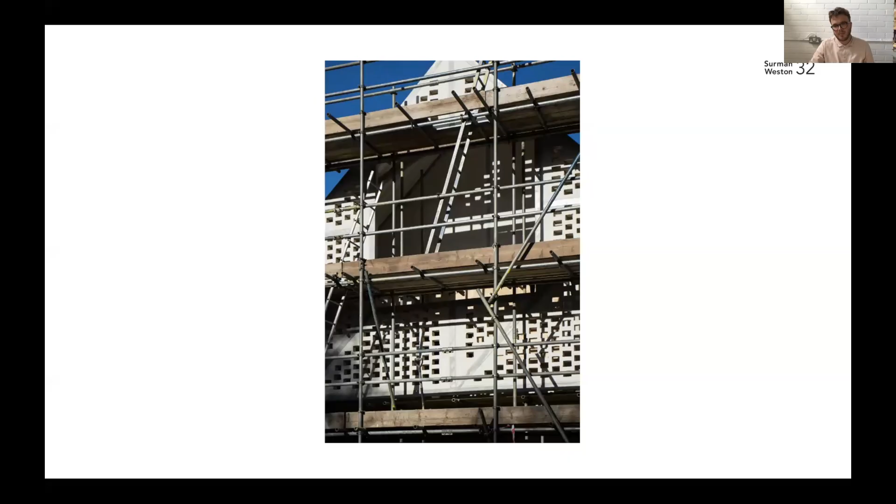Flexibility of finishes is quite important to us as a studio. It's something we're always interested in trying to push. We really liked the finish of the slurry brickwork and the galvanized steel as a raw finish when it went on. Although eventually we ended up painting it white, we quite like the idea that designs can have multiple appearances, so it can change with tastes.

In 20 years' time, if someone decides they get bored of the white house and want to strip off the paintwork and expose the brickwork, that's kind of fine by us. Or they want to paint it Technicolor, pick out the steel in bright orange or something. We kind of like the fact that that could happen.

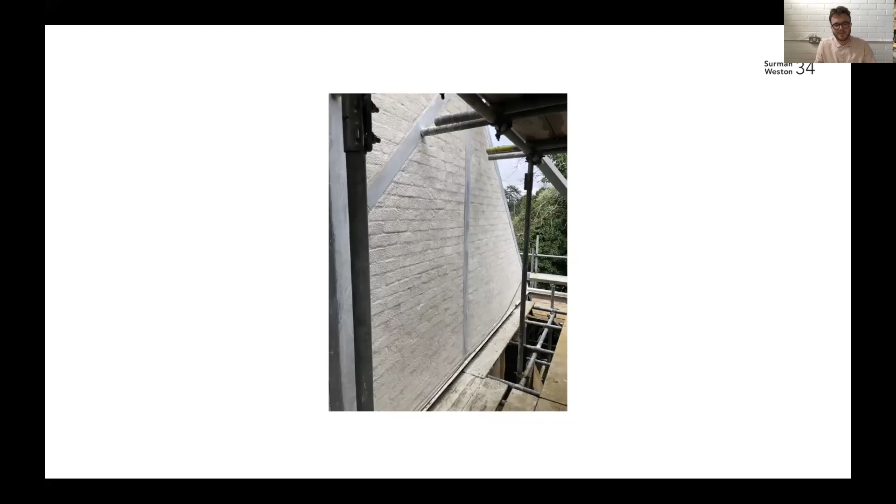The issue we had was where these two join, because obviously you don't want the heat bleeding from the inside to the outside. So we eventually developed a detail with numerous thermal breaks within the structure, which were basically big insulated connections that stop the heat from the interior structure going to the external structure.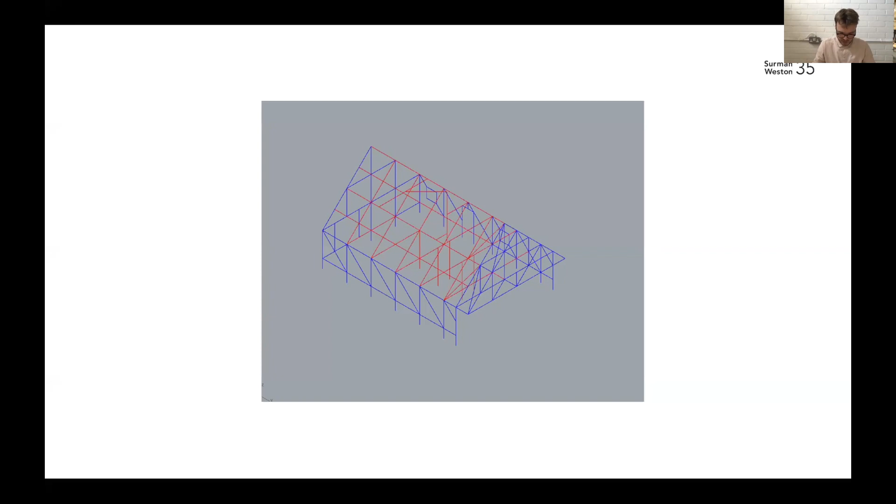Another technical challenge was how to deal with the expansion, the difference in expansion between the steel and the brickwork on the external panels. Because steel and brick expand at very different rates in the summer and winter, without a careful detail there's going to be a lot of cracking there.

So basically every panel is quite subtle - pretty much invisible - but every panel has a mastic joint, on 2 sides, some of them have 3, between the brickwork and the steel, along these edges. Then we developed a detail where after the mastic was applied, while it was still semi-tacky, we brushed on the slurry very shortly after. So you can't see the mastic, but it retains a structural flexibility.

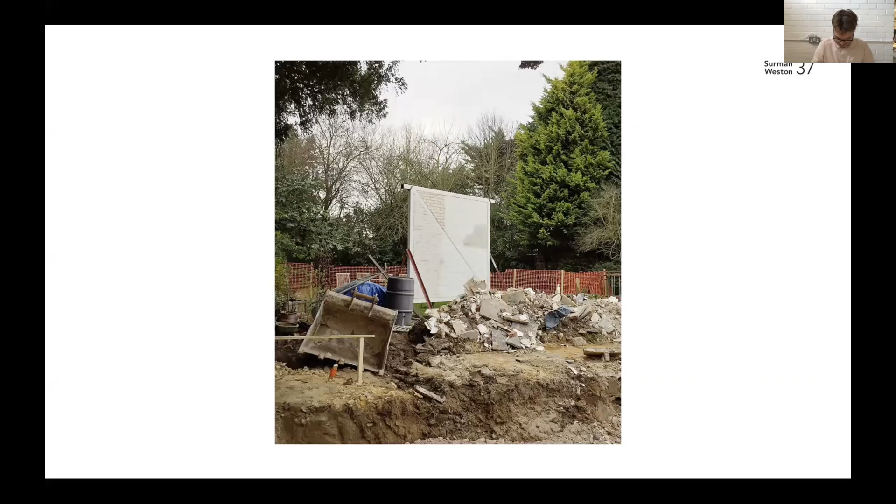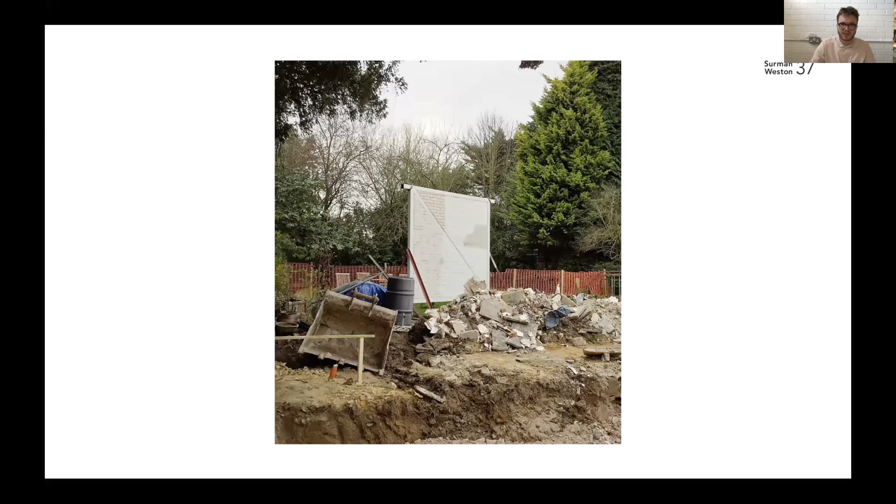We tested this detail over the period of a year, in all seasons, to make sure it worked with a panel that was on site. We developed this with a contractor who was very helpful and quite open to experimentation. So that concludes my presentation. Thank you very much for listening.

Any questions? Fantastic, yes there are. I'm just going to run through a few of them to you, and perhaps you can come back how you'd like to. One is about the predominantly white colour scheme - was this a client request or developed through the design process?

I think it was mostly a client request. I suppose the Palm Springs influence was quite strong, and she was very into these quite minimal interiors, but at the same time did want some warmth within the interior. So when we developed the detail of the painted and slurry blockwork in the hallway, that was quite a breakthrough moment for us. She was really into bringing some of these more industrial textures into the project rather than just having white plastered walls everywhere.

Mm-hmm. So great looking building. Thank you. I agree with that, but this isn't a question. And by the way, it's really interesting to see your presentation and the one before on 2 such different buildings, both with Crittall windows in them.

But hey, was dealing with the junction of the roof and the walls with the exposed soffit a challenge? How did you deal with air tightness? And then I'm going to ask you another one as well, and I think you can answer them together: how did you reconcile the single step changes of level with building control?